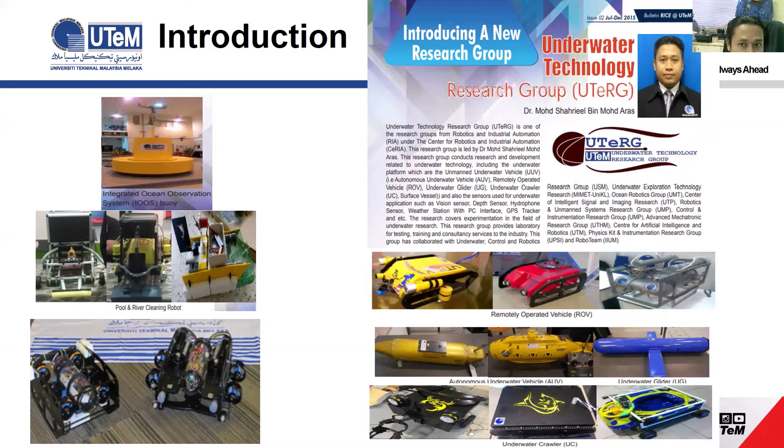This is my research group that we call the Underwater Technology Research Group, or UTeRG. It is one of the research groups from Robotics and Industrial Automation, RIA, under the Center for Robotics and Industrial Automation, CeRIA, in the Faculty of Electrical Engineering, UTeM. As you can see in the slide, we have already developed a lot of underwater platforms, such as ROVs, remotely operated vehicles, and autonomous underwater vehicles, AUVs. We also have underwater gliders, an underwater crawler, a pool and river cleaning robot, and an integrated ocean observation system. So this is some part of our underwater platforms in our research group.

Next, we go to the single input fuzzy controller. This single input fuzzy controller is inspired by the conventional fuzzy logic controller based on the signed distance method and the piecewise linear control surface. The signed distance method was introduced by Choi in 2000, and the piecewise linear control surface method was introduced by Ayub in 2009. So the conventional fuzzy controller with the 7x7 rule matrix is simplified into a single input with several rules, which we call the single input fuzzy controller. Before this we had 49 rules, then we simplify into 7 rules.

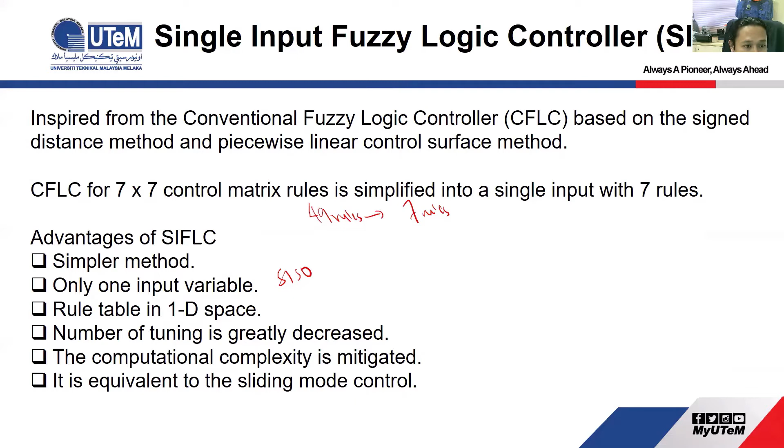These are some advantages of the single input fuzzy controller. It's a simpler method, with only one input variable, so we call it a SISO system, meaning a single input, single output system. The rule table will be in one-dimensional space, and the number of tuning parameters is greatly decreased. As I mentioned, we had 49 rules because we used the 7x7 rule matrix, reduced to 7 rules. The computational complexity is mitigated, and it is equivalent to sliding mode control.

As you can see here, this is the conventional fuzzy controller, which has two inputs. For example, input number one we declare as the error, and input number two as the change of error, or delta error. Normally we use Mamdani as the inference engine, and this is the output. You can see the membership functions here: input one, error; input two, delta error; and also the output.

Table one is the 7x7 rule matrix of the conventional fuzzy controller. Actually, this is a default rule. From this table you can see we have the diagonal line here, and also another diagonal line here. This part we can declare as the saturation region, and this part also the saturation region. This is the main diagonal line we call LZ, and parallel with it we have LN, LS, and so on.

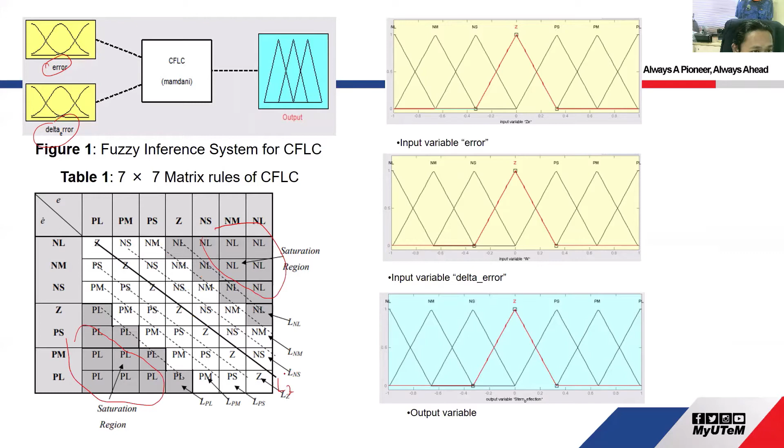This we call the signed distance method, proposed by Choi. From this diagonal line, we introduce the equation of a straight line, and from the straight line we have other lines parallel with the diagonal line. So we have the distance between the diagonal lines, for example, this is the diagonal line for LZ, and this is the diagonal line for LPS.

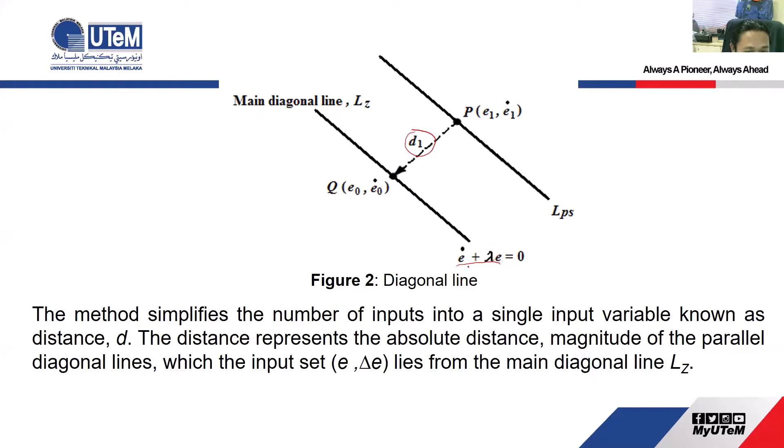And then this method simplified the number of inputs to a single input variable known as the distance d here. Okay, so the distance represents the absolute distance magnitude of the parallel diagonal line, which is the input set for the input 1 error and delta error, from the main diagonal line. So this is the main diagonal line, we call the LZ. Right, so this is the derivation from the main diagonal line to get the distance here, the absolute distance.

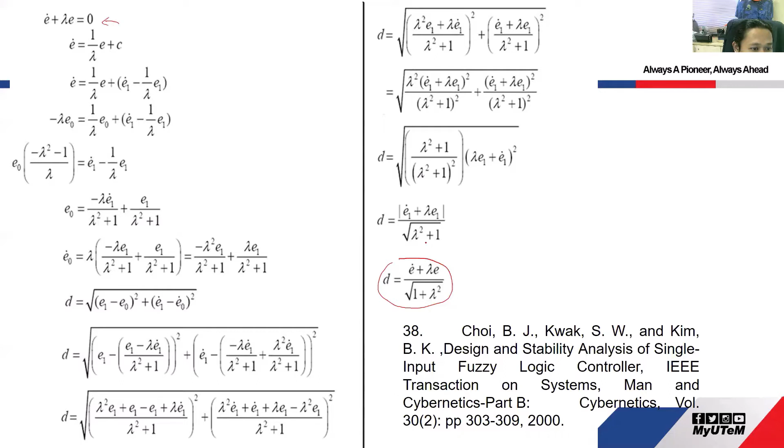So this derivation comes from Choi in this paper, Design and Stability Analysis of Single Input Fuzzy Logic Controller. You can see the detail of this derivation from the main diagonal line, the straight line, until you get the d here. All right, so from the diagonal line, we calculate the distance as you can see.

So this is the single input fuzzy logic controller structure. First of all, you can declare this as the input 1 error, and this is delta error. And then this is the d, the distance. This one we call the signed distance method, and this one is a piecewise linear control, piecewise control surface.

And then we convert it into a lookup table. The control surface can be approximated as a piecewise control surface constructed using a simple lookup table proposed by Ayub in 2009. And then this is the scaling factor.

As you can see, when we convert it into the block diagram in MATLAB, this is a single input fuzzy controller. This is input 1, input 2, and this is D, and this one we call the scaling factor. So we can declare this one as K1, this as K2, this is D, and this one as K3. So these are the single input fuzzy controller parameters, and they will be implemented in MATLAB.

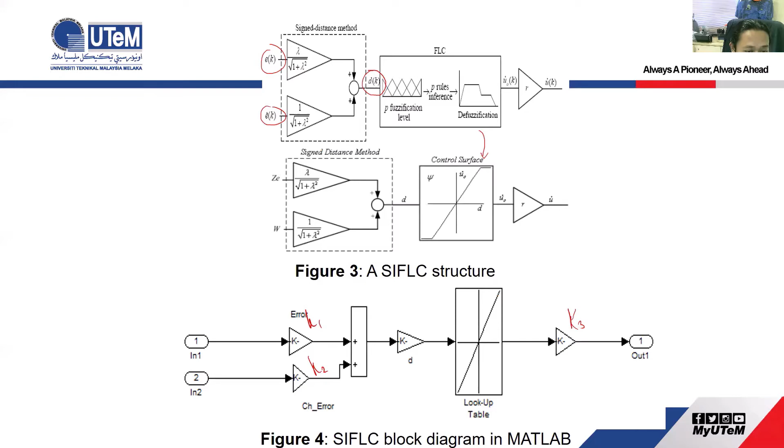Alright, so next I will explain the ROV, the plant that we use to verify the effectiveness of the proposed control scheme. In our research group we have the first ROV here, second ROV, third ROV. For this simulation we use the first ROV because of stability, because the second and third ROV are not stable. That's why we just focus on the first ROV.

First, what is the ROV? ROV stands for remotely operated underwater vehicle. The ROV is unmanned, highly maneuverable, and operated by ROV pilots on the underwater platform. Normally ROVs are linked to the platform by a tether, sometimes referred to as the umbilical cable, a group of cables that carry electrical power, video or data signals to the ROV pilot.

Normally ROVs are used in the deep water industry, such as oil and gas exploration, telecommunication, geotechnical investigation, mineral exploration, and so on. Actually, the control system of the ROV is a very interesting and challenging problem. This is primarily due to the difficult and unpredictable environmental disturbances that exist underwater.

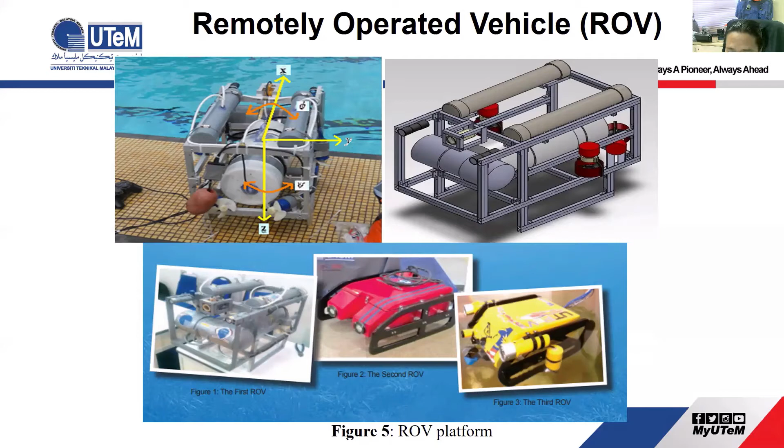Actually this is a standard for unmanned underwater vehicles, where M is the 6 times 6 inertia matrix, including the hydrodynamic added mass, and then C is the Coriolis and centripetal force. We have the hydrodynamic damping matrix, and G is the vector of restoring forces and moments. This equals B, where B is the control matrix.

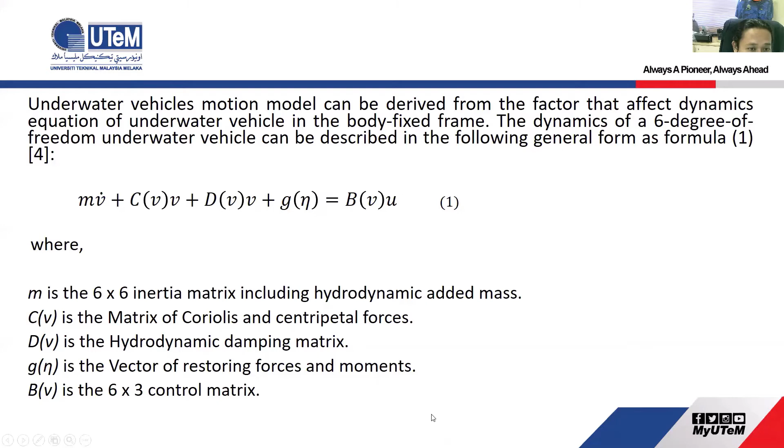Since the ROV is considered to be fairly symmetrical and travels at low speed, the decoupling for the vehicle degrees of freedom is valid. The decoupling means that the Coriolis and centripetal terms, the C matrix, become negligible, and consequently we can eliminate them from the dynamic model. So from the equation we eliminate C, the Coriolis and centripetal force.

Then the simplified dynamic model for the ROV becomes this, and we focus on the motion on the Z-axis. As you can see in figure 6 is the model of the ROV in MATLAB simulation, and these are some parameters of our ROV. Some parameters we can get from analysis using the software, and some from experimental data.

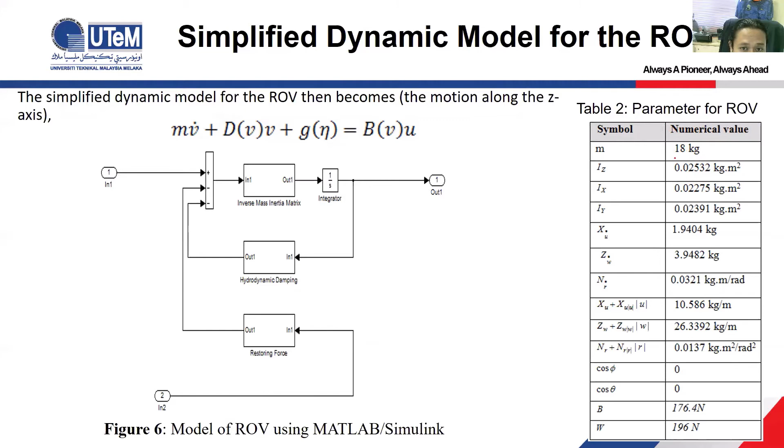As I mentioned, for the single input fuzzy logic controller, we made some improvement from the standard single input fuzzy logic controller proposed by reference 15, Kashif, based on the paper single input fuzzy logic controller for unmanned underwater vehicles. In this paper they use 7 rules, as you can see in Table 3.

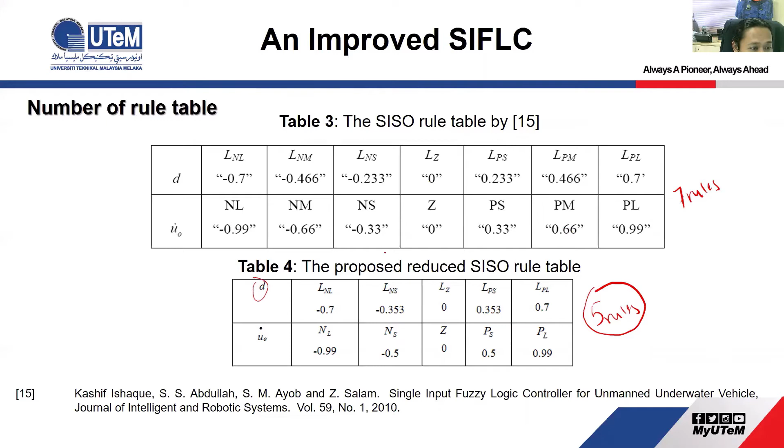So in our part, we try to reduce to only 5 rules. Initially they used 7 rules, then we made some improvement and reduced to 5 rules. But for the value of D, we use the formula, as you saw before, to get D.

So this is the system response based on reducing the rules table to 5. This one is using the 5 rules. As you can see, if you use the 7 rules, there is no overshoot. Compared to that, if you use the 5 rules, there is a very small overshoot here.

But for the rise time, I think it's around 7 seconds. Compared to using 7 rules, the rise time is around 15 or 17 seconds. That's the improvement when we reduce the number of rules, but we introduce overshoot here. So we try to do another improvement to eliminate this overshoot.

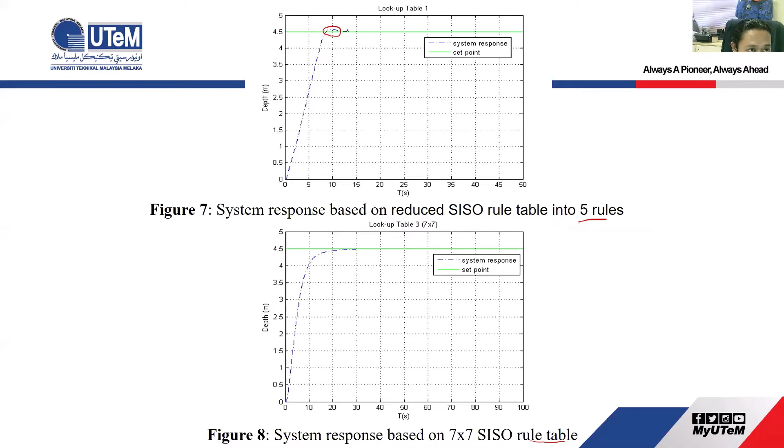Next we introduce what we call the reference model. This reference model acts as the input filter, so the output signal can follow the set point as needed. Then you can see the system response with the reference model. No overshoot happens here, and the system response is good, around 14 seconds. Compared to 7 rules around 17 seconds, but with 5 rules without the reference model around 7 seconds.

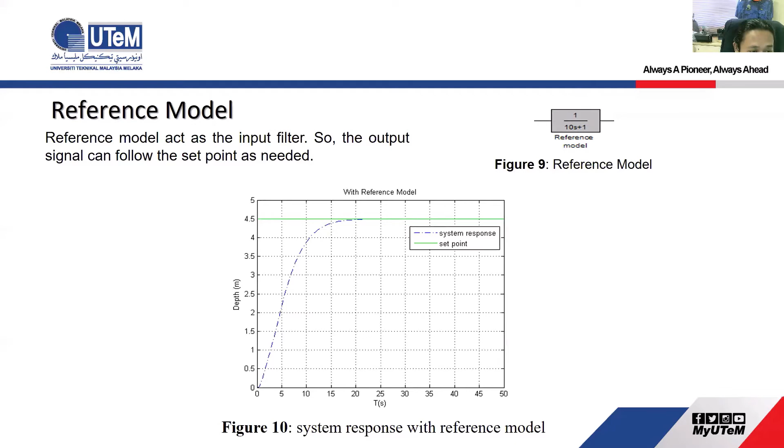The next improvement on the single input fuzzy logic controller is that we introduce a linear equation in the lookup table. We introduce a linear line on the control surface in the lookup table, using Excel. On this linear line we get the equation 0.2777x minus 1.1109, and then we convert it into a block diagram in MATLAB Simulink and replace our lookup table.

So this is the result, the system response using the linear equation as the lookup table. Very good system response. You can see there's no overshoot here, and we have good rise time and also steady state error.

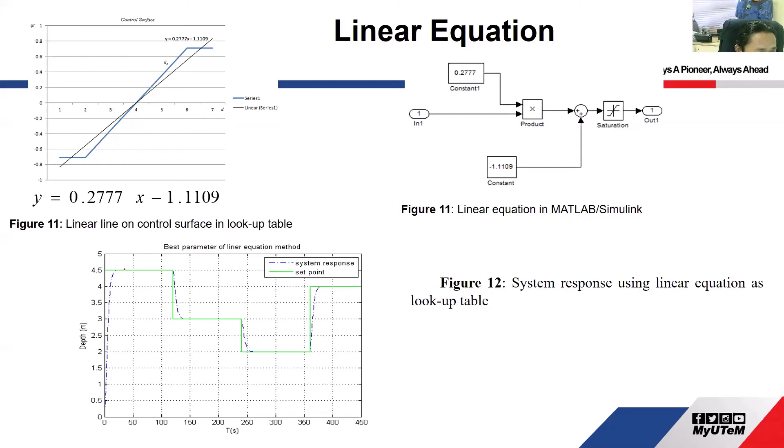Actually, the parameters for the single input fuzzy logic controller, K1, K2, K3, are tuned by PSO. The particle swarm optimization algorithm is applied to tune the parameters of the single input fuzzy logic controller for control of the ROV. For PSO we use two improvised methods: priority based fitness PSO and binary priority based fitness PSO. So in the PSO, we set the priority.

First, that means we focus on the overshoot, because our objective is to reduce or to eliminate the overshoot in the system response. Then we focus on the settling time, and also the steady state error. After we get K1, K2, and K3, we do some analysis using the intersection and average value, based on the PSO algorithms.

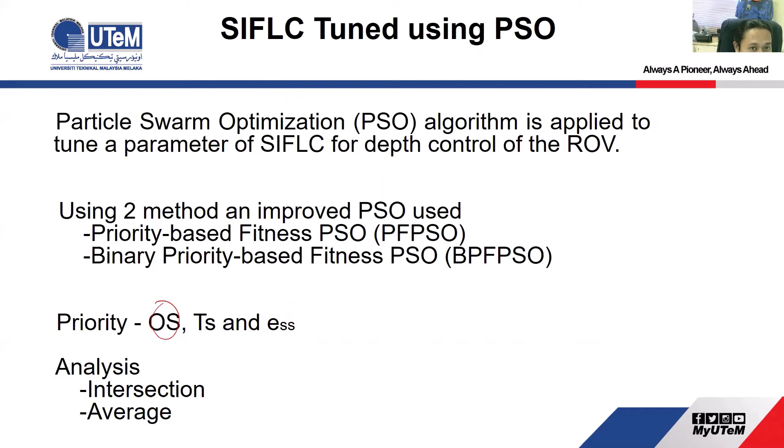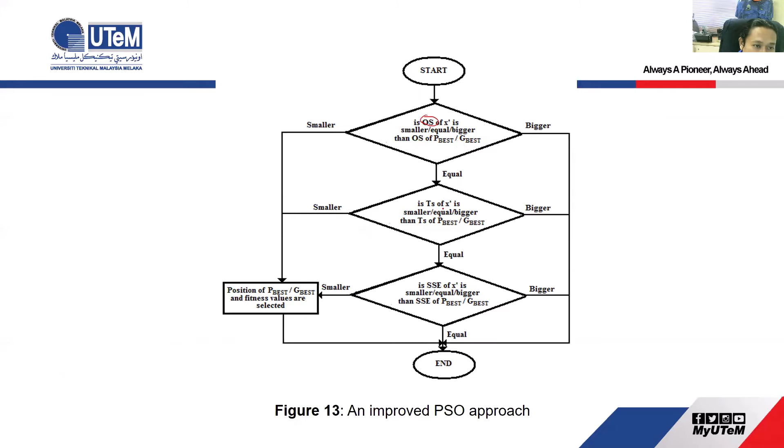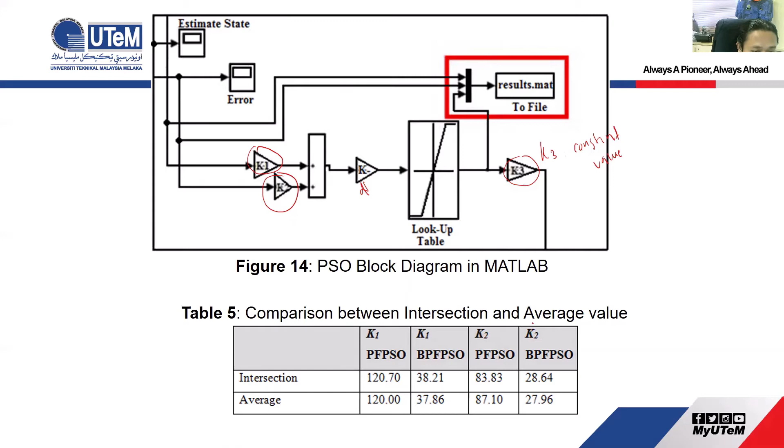Compared with K1 using the BPFPSO, 38.21, for average it is 37.86. So this is K1 using the PFPSO, this is K2 PFPSO, and this is K2 BPFPSO. And then we try to run again. So this is the result.

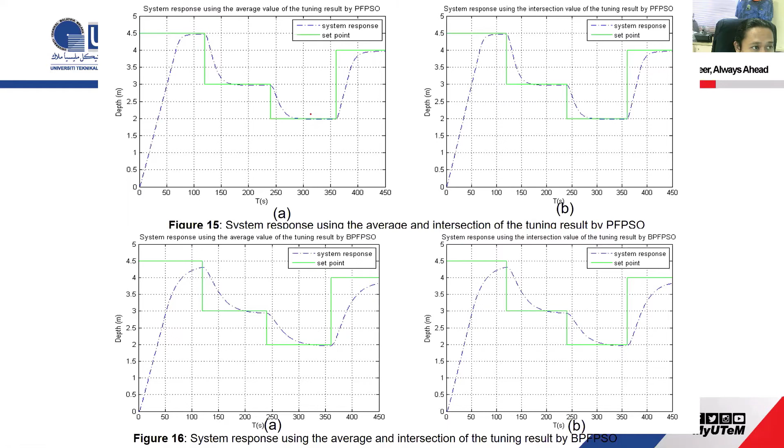As you can see, figure 15 is the system response using the average, and another one is intersection using the tuning result by PFPSO. Figure 15 is the PFPSO, and figure 16 is the BPFPSO. From both you can see the performance for system response, I think the PFPSO is better compared to BPFPSO in terms of overshoot, steady state error, and rise time.

Also in our research we try to implement other controllers such as NNPC, neural network predictive controller, and also the PI controller, single input fuzzy controller, LQR and improved single input fuzzy controller. Figure 17 is the comparison of the system response for all controllers applied. Table 6 shows the computational time for every controller applied.

As you can see here, the improvement is very fast, around 10.45 seconds, compared to NNPC. NNPC takes a much longer time, around 450-something seconds. Then you can see the performance for rise time, settling time, and overshoot here. The improvement can eliminate the overshoot.

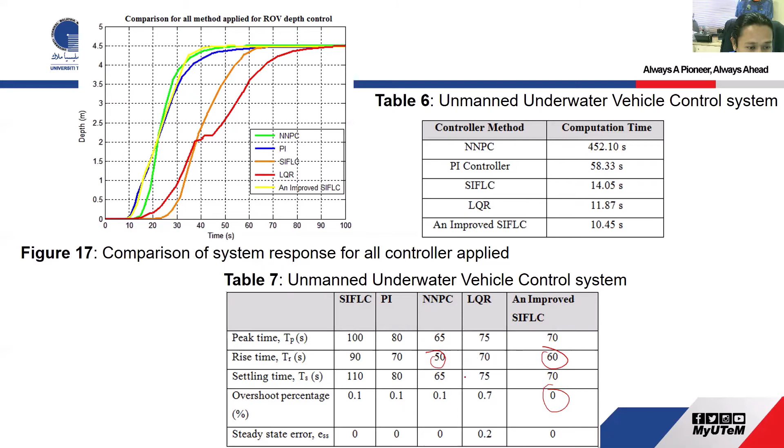But as you can see on the rise time, the NNPC is better than the improved single input fuzzy controller. For example, NNPC is around 50 seconds, and the improved single input fuzzy controller is around 60 seconds. That's why we try to introduce another technique to improve the rise time, and also to eliminate the overshoot.

That we call the adaptive simplified single input fuzzy controller. The word adaptive is inspired by the concept of the adaptive controller. The adaptive simplified single input fuzzy controller technique works by combining different settings of the single input fuzzy controller optimized by PSO. The optimum parameter for every case is used to test the ROV on different set points, and the adaptation of the different set points is based on the previous optimum parameters tuned by an improved PSO algorithm.

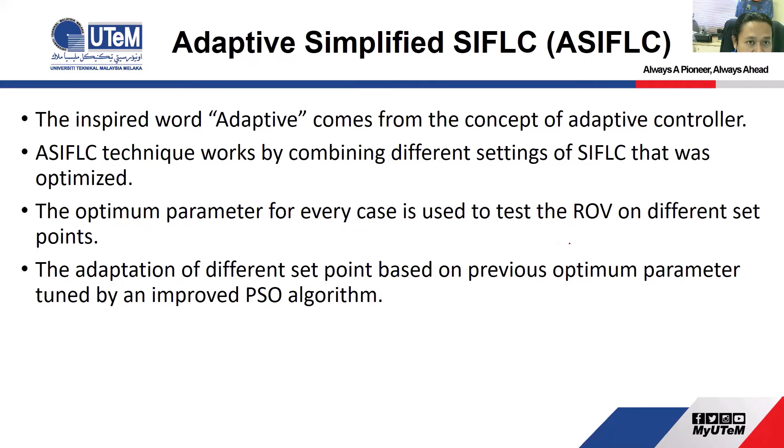So that is the new technique that we introduced to eliminate the overshoot and to improve the rise time, which we call the adaptive simplified single input fuzzy controller, or ASIFLC. You can see figure 18 here. This is the system response for set point 1 tuned by PSO. First we tune by PSO, so we put some step response here.

And then you can see the system response for set point 2 on the parameters of set point 1. That means first we get K1 and K2 using the PSO, and then after getting the parameters K1 and K2 here, we use these parameters for set point 2.

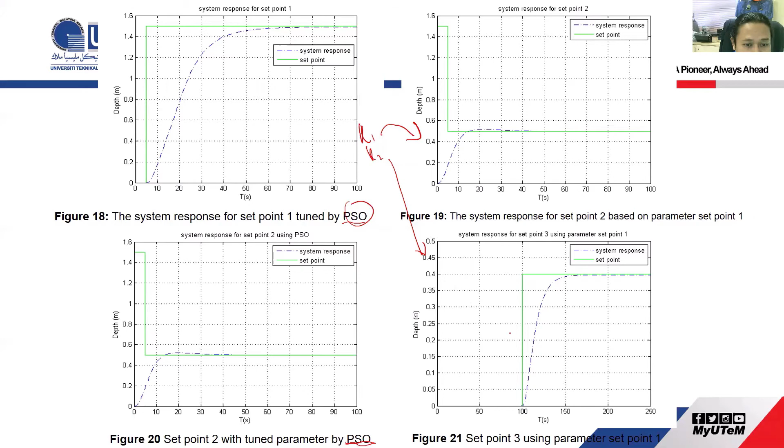So for figure 20, we try to tune using the PSO. Figure 21, set point 3, another set point. We use K1, K2 here from set point 1, K1 and K2 from set point 1. Next, figure 22, set point 3 uses the parameter from set point 2, K1 and K2 from set point 2. Then figure 23, 24, 25.

Figure 24, set point 3 is tuned parameter by PSO. So this one uses the PSO, and we try another different set point here. But based on set point 1, K1 and K2 based on set point 1.

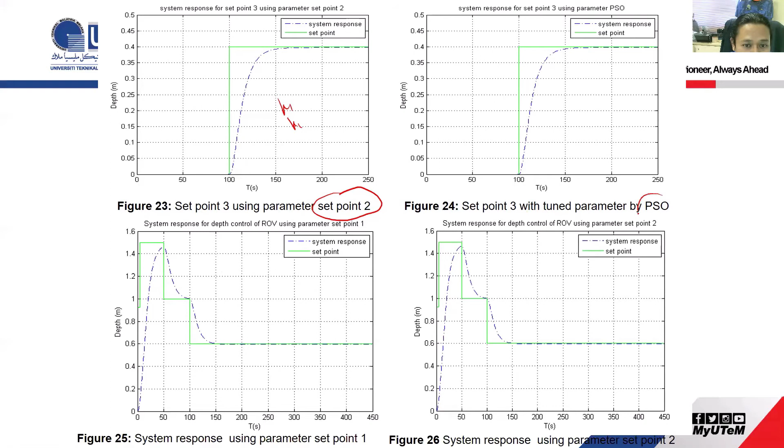This one uses the same set, a different set point, but based on set point 2, K1 and K2 based on set point 2. For figure 23, set point 3, we use K1 and K2 from set point 2, the parameter from set point 2. Then for set point 3, we try to use PSO.

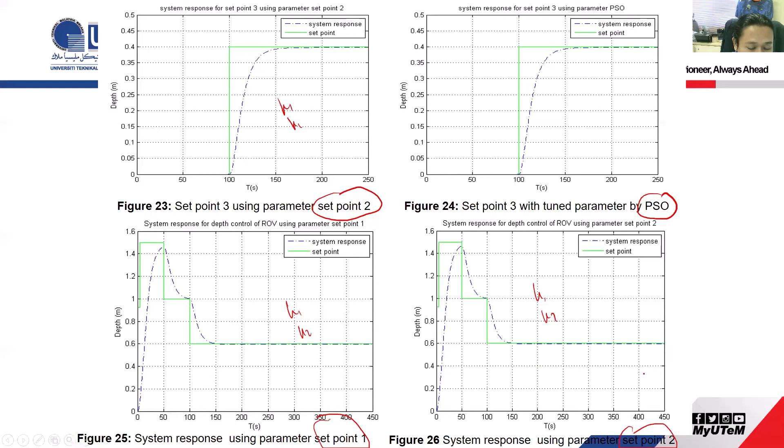Figure 25, this one uses K1, K2 from set point 1 parameter, and this one K1, K2 based on set point 2. Then for the system response, this one uses K1, K2 based on set point 3 parameter. And this one we try to tune using the PSO.

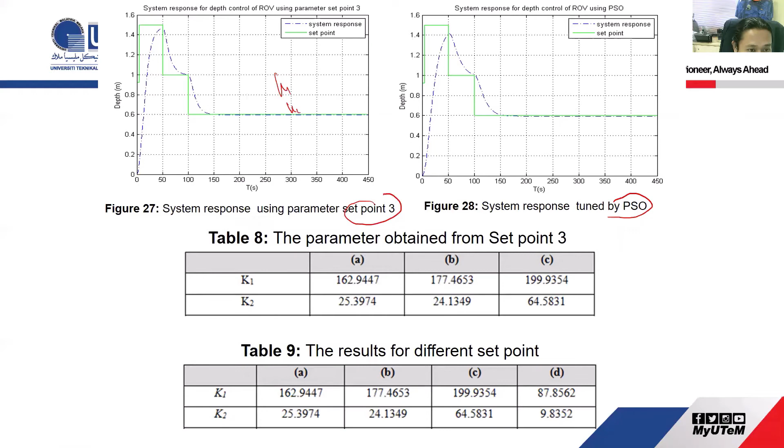From this, we can conclude that the parameter K1 and K2 can be similar to a lookup table, or similar to a piecewise continuous surface, constructed using the lookup table. That is our conclusion for this technique, meaning we can convert K1 and K2 into the lookup table.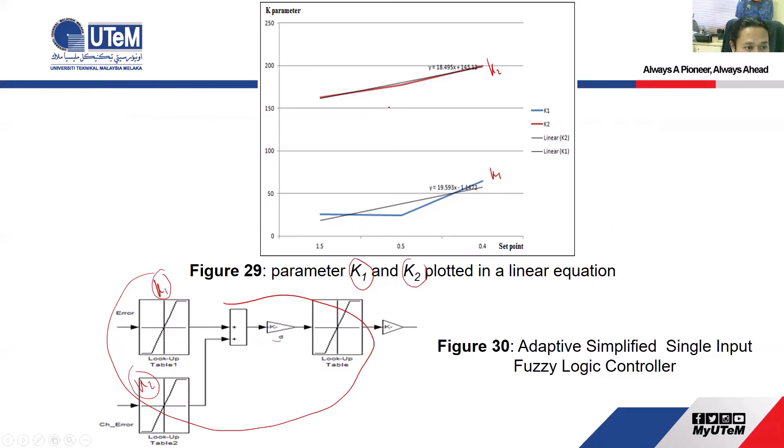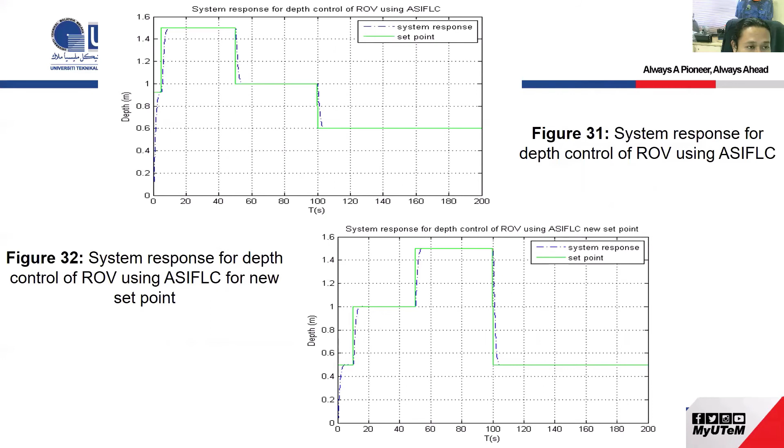This is the result for the proposed control scheme, the adaptive simplified single input fuzzy controller. You can see figure 31 and 32, with different set points, but both show no overshoot, very good rise time, and good steady state error. This is the system response for the depth control of the ROV using our proposed control scheme.

As you can see, this is the controller simulation block diagram using MATLAB. This is our ROV model, and in this part we try to introduce environmental disturbance, which we obtained from the references. So this is the adaptive simplified single input fuzzy logic controller simulation block diagram.

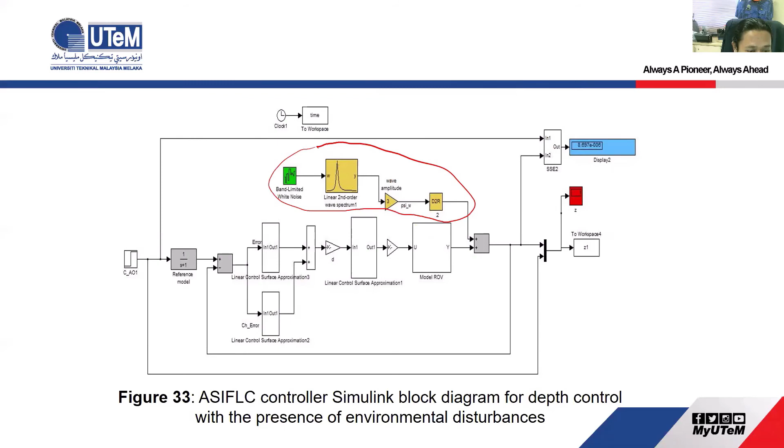Okay, so this is the result for system response for the adaptive simplified single input fuzzy logic controller, and we compare with the one tuned by PSO. You can see a lot of improvement compared to using PSO tuning.

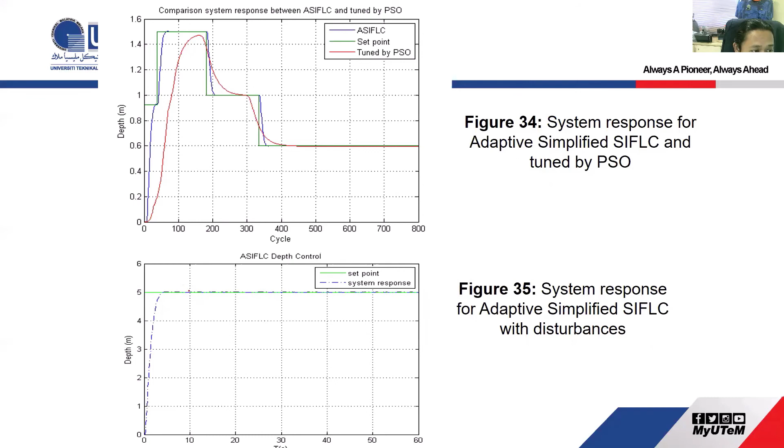This figure 35 is the system response for adaptive simplified single input fuzzy logic controller with disturbance. You can see our ROV can still maintain at a certain depth, for example 5 meters. This is for simulation. On real time, our ROV also looks like it maintained at the desired position.

So this is the real time ROV result, but there's a limitation: because our lab tank test is only around 1.8 meter depth, we just focus on 1 meter depth testing.

You can see this is the system response for the depth control of ROV using the single input fuzzy logic controller at 1 meter. We tried several testings per experiment. You can see here we also have some noise.

But actually if you see on the video, our ROV maintains at 1 meter. This data comes from the sensor, which we plot to MATLAB, so that's the actual data. But on the real time, the ROV is almost maintained at the 1 meter depth.

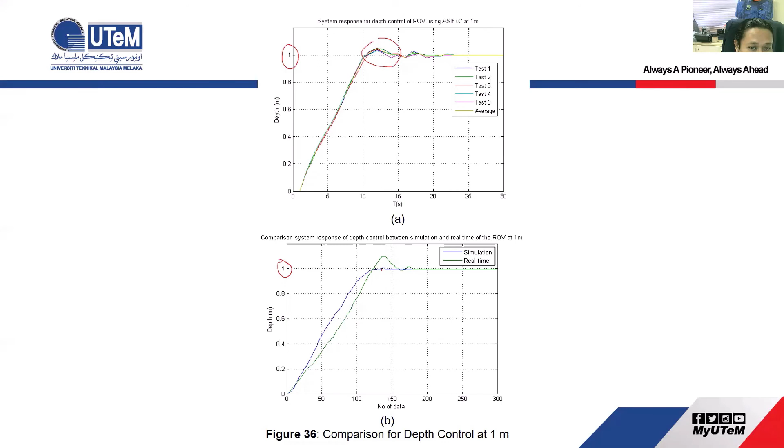Another figure, 36, is the comparison between simulation and real time. You can see the simulation has no overshoot compared to real time, but both are almost close together, simulation and real time.

Then we tried to implement our controller on other models of ROV, first the Mako ROV. You can see this is the simulation for the Mako ROV using the adaptive simplified single input fuzzy logic controller, which is our contribution, our controller scheme.

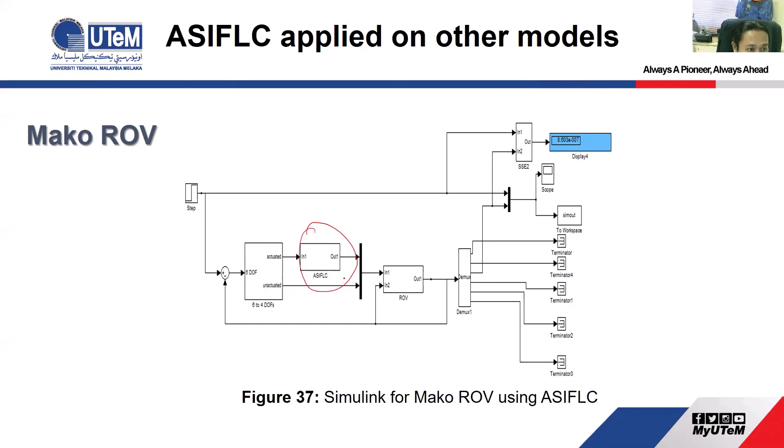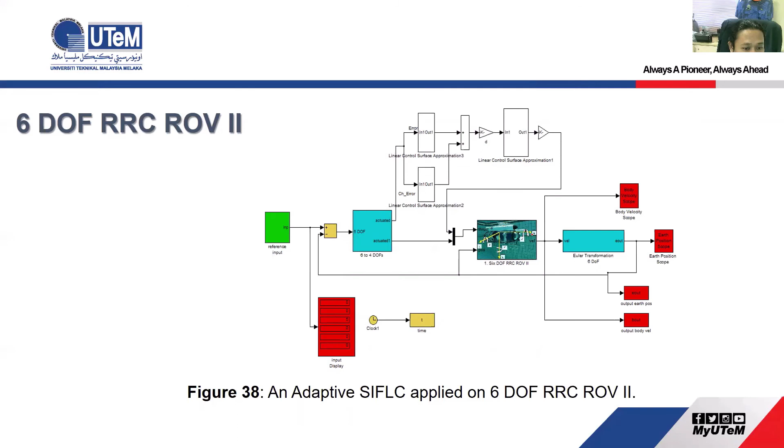Then we tried to implement our proposed control scheme on the 6 degree of freedom RRC ROV II. This is a simulation using MATLAB.

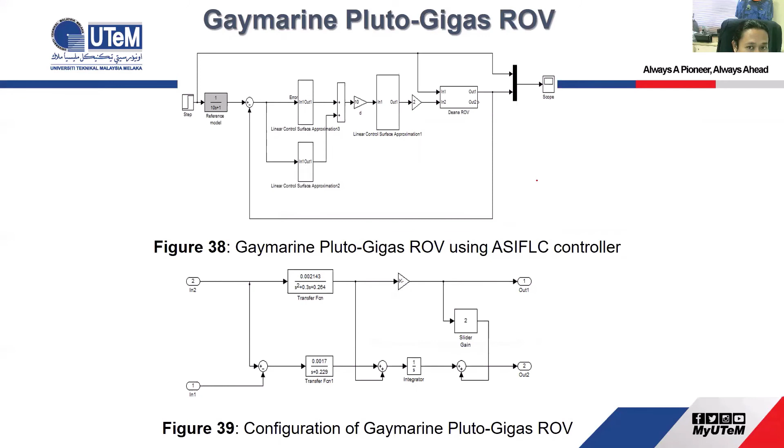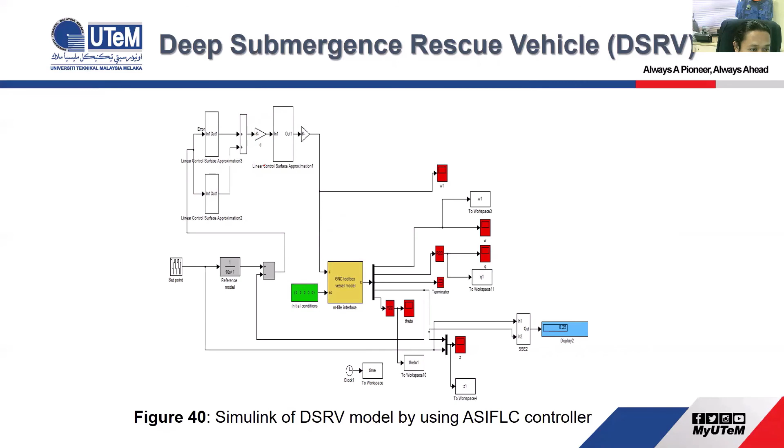And last, we tried to implement it on the deep submergence rescue vehicle. You can see this is our proposed control scheme, and then we compare the performance for every model.

This is a comparison of system performance using the single input fuzzy logic controller for every model, for example the Mako ROV, the non-linear RRC ROV2, the Gaymarine Pluto-Gigas ROV, and the deep submergence rescue vehicle.

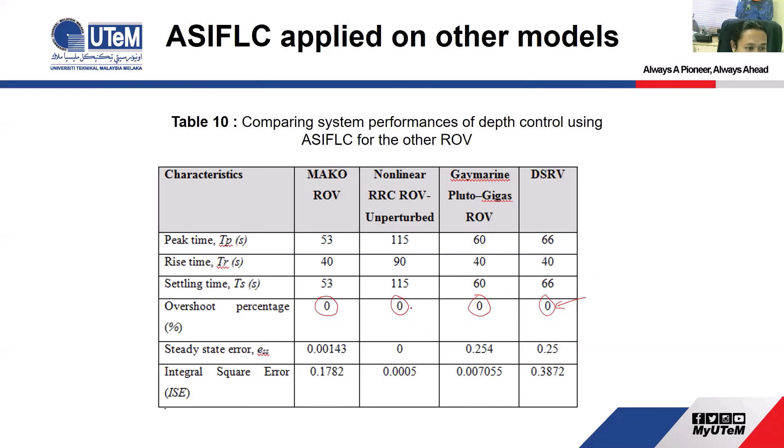As you can see, our main objective was to eliminate the overshoot. Our proposed control scheme, the adaptive simplified single input fuzzy logic controller, can eliminate all the overshoot on the system response. Maybe the rise time and settling time are not as good compared to our own model, but our objective was to eliminate overshoot since our research priority is on depth control and overshoot.

Last but not least, my conclusion: this investigation looked at the effect of tuning the variable parameters for the single input fuzzy logic controller to improve the performance of the system response for depth control of ROV.

We introduced a reduction in the number of rules from 7 to 5, and introduced a model reference to reduce and eliminate the overshoot. We also changed the lookup table to a linear equation, which is an improvement on the single input fuzzy logic controller.

An improved PSO algorithm based on the priority-based fitness and binary priority-based fitness approach was implemented to find the optimal single input fuzzy logic controller parameters, using PSO to find the optimal parameters for K1 and K2.

A new method, which we call the adaptive simplified single input fuzzy logic controller, for depth control of the ROV has been tested on our ROV1, and also on four different types of ROV.